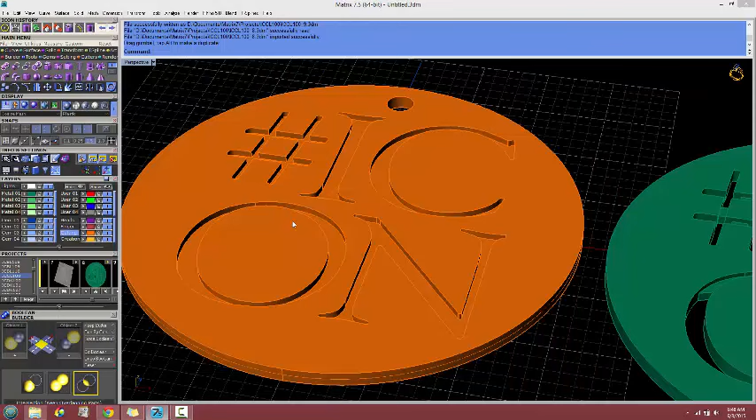And the reason why is, if we go back to that, there's nothing holding this piece. This would just fall right through if that was not attached to something. Now this one is completely pierced out. Okay, so this is recessed. This one is pierced. Okay, so I've got this thing laid out in those two ways, recessed and then also pierced. So I'm going to render these both ways for you, and you tell me which one you had envisioned.

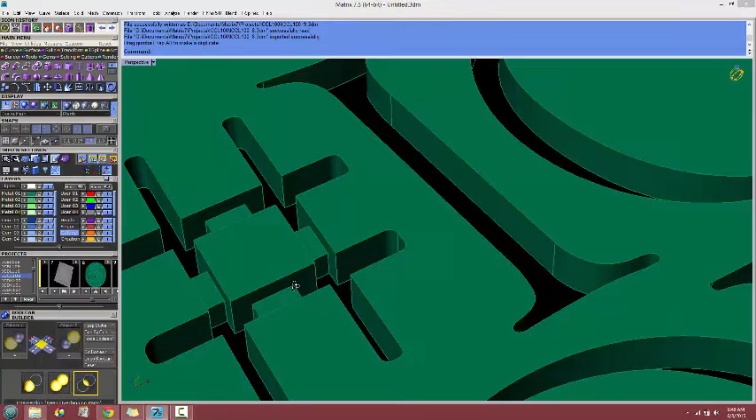Now, when I did the pierced, so the C, the N, the I, those can be just completely pierced. But the hashtag, if I don't have these little supports here, this just falls through. There's nothing to hold it, to join it to the rest. Now, those little supports are also recessed. So we do try to kind of keep them so that they'll just fade away to the eye.

And then when I do on this round piece to connect the inner of the O to the rest of it, I do recess those and I also kind of curve them. So that is the two different ways that can be done.

And I also wanted to give you a physical measurement on this. Let's see where I ended up. I set boundaries for how big it should be. It's 31 millimeters. Okay, so 31 millimeters is about just under 1.25 inches. It's 1.22 inches. Okay, so I'm going to go ahead and prepare these files after I hear from you about which one you like. And also, I'll need to know what metals that this needs to be rendered in.

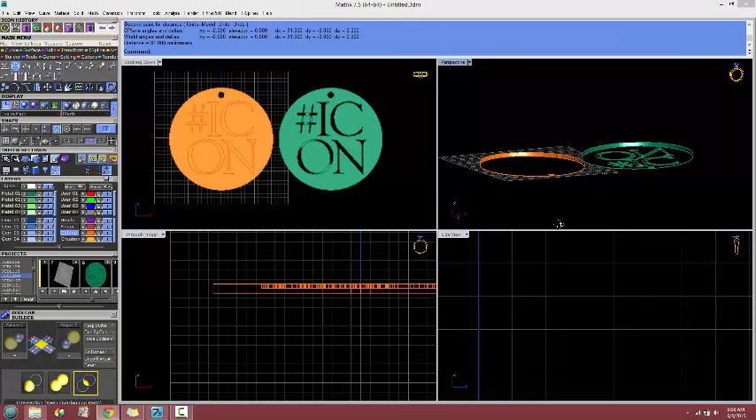This computer file hooks into a 3D printer, and so this piece will print in wax just like it is now, and then we use that wax to make a mold to pour the metal into. So however this comes out here is how it's going to come out in finished metal, okay?

And I guess the only other thing, if you do want like a smaller version of this, let's just go ahead and address that question while we're here. There is a limit to how small these can be done, and there's a reason why. When we make a mass-produced piece like this where there's a metal mold, it's not the same as having something engraved with a laser, okay?

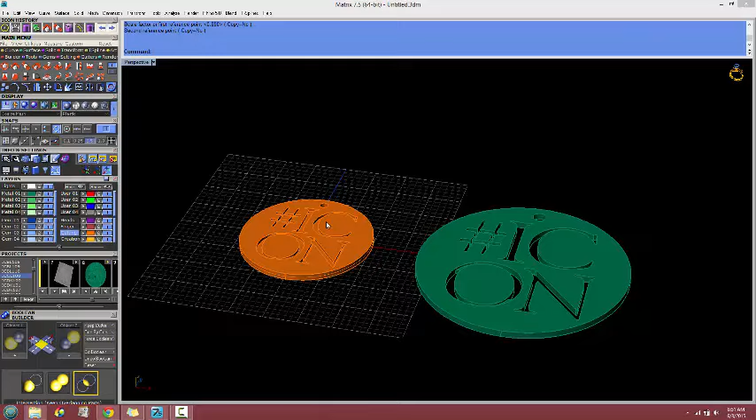But it sometimes ends up being less expensive for production to just cast these and polish them, okay? So I think we're on the right track doing the casting. But when we take something that is metal mold and we cast and polish it, and the engraving's already cast into the piece, we reach a limit as to how small this can get. So let's say, let me just take a measurement. Let's say you wanted one that was like a mini-me here, like a 20 millimeter. Not saying you do, but just in case this question happens to cross your mind later.

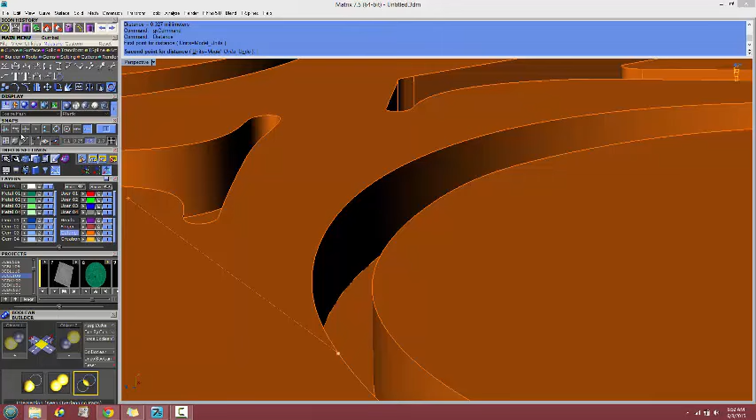The space between here and here really cannot be smaller than 0.3 millimeters, okay? And so actually you are about, what, 0.327? Let's see, now, is that the smallest area on here? Probably. And I actually am using the first font that you sent me. The second font, although it was thicker, it was more problematic getting the whole piece to stick together.

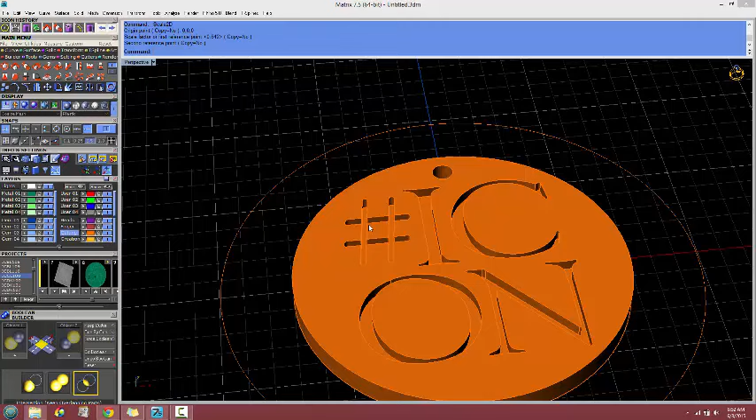Yeah, that's about as small as that can go, is about 20 millimeters. Okay, so if you do want to make a smaller version, that's going to be your limit. Let's say, for instance, you wanted one that was even smaller. Then everything has to change, right? So if this gets smaller, then all of these details have to get thicker. So those are some of the things that we watch out for.

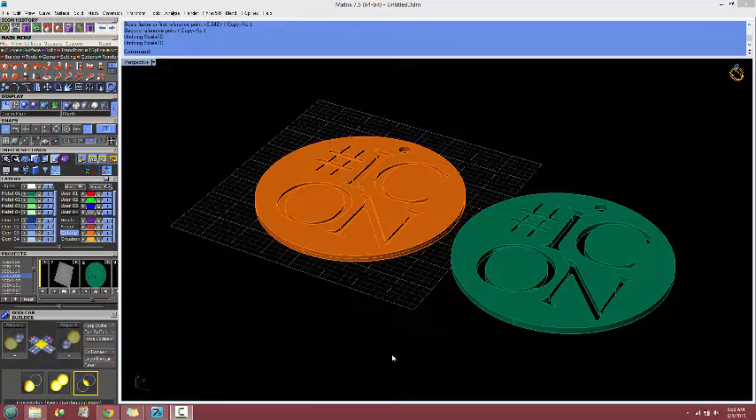There's one other thing I wanted to address on these pieces. Let me pause and think for a second. Oh yeah, okay. So when I got your file, I did have to change a couple things, and I want to go over those changes in case you're noticing them, okay? So let's go back to these, the two original pieces that you sent me, right?

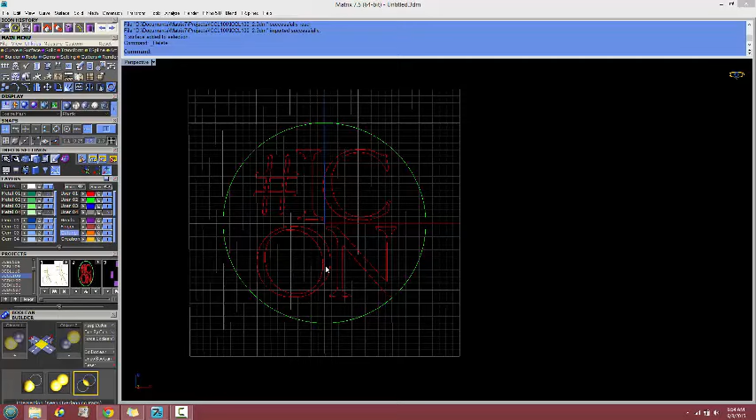Even that being the case with this guy here, see how these just barely touch? What happens here is as this piece of metal gets really sharp and thin, it starts to break off during molding and casting. So that's something that I had to address. And then also the space between here and here is just a little bit too tight for pierced. So there's a couple different areas here that the letters were just packed in slightly too tight for what can be done. Remember, you're looking at it like this is huge, but you have to keep in mind actual size. So I did modify this so that it's production ready for jewelry.

Okay, so now you're seeing that these two pieces don't completely touch anymore, and that's actually only 0.1 millimeter in there in space, so it's really negligible. But that gives us enough continuity in the metal to slink through here and hold this piece together. When we really try to push the envelope for things being tiny and tightly packed, we don't get a good product. And a piece like this, the metal, when it's cast, it has to come out beautiful because you've got a very bright polished top on it.

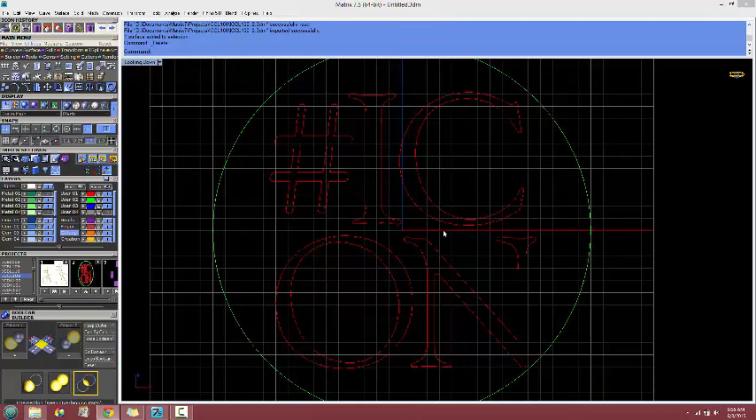And if we pack all of this stuff in too much and have these little sharp corners on things, the mold starts to break up during the casting process, and we'll end up with what's called porosity in the piece, and it just looks terrible. So that's how I modified it. I just spaced these things out a little bit. And then this piece here is completely centered, but lettering is tricky, right? So this is centered, but because the N has this leg on it over here and the O doesn't, I moved the entire piece up just a little bit.

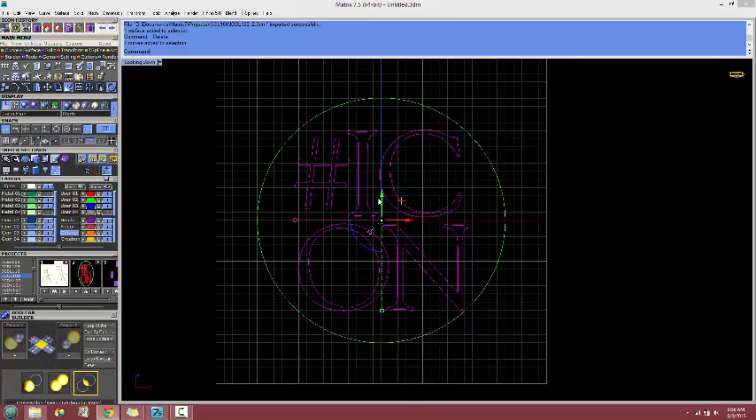So those are just some of the minor changes that I made so that this could be cast in metal. Okay, all right, hopefully this video was informative and helpful for future designs and for this one. So I need you to answer 2 questions. Do you want it recessed or pierced? And I need to know what metals you would like this rendered in.